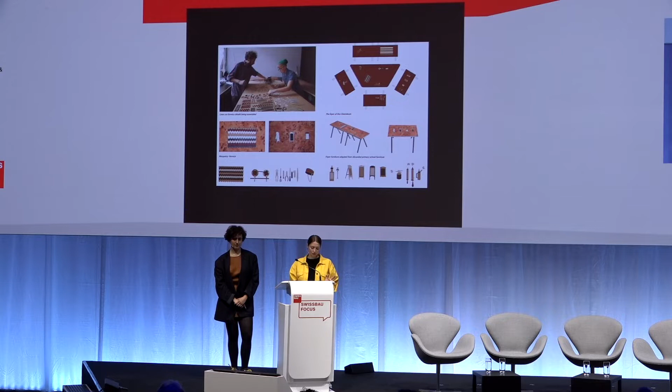It's a way of working, of defining just enough beforehand to ensure some success, but with enough slack to allow the project to take on a life of its own in an unexpected way. In this sense, the material we were working with was as much the method for making as the material itself. And designing clear ways of communicating the material intentions was as important as their design.

Since then, I guess it's been 12 years now that we've been working, we've worked on a range of projects, and we're going to share just a few which talk about materials.

So this is somewhere where material and craft skills are very connected to place, in Tokushima in Japan, where we designed this space for beer tasting for a brewery.

We worked with a lot of local artisans who are specialists in timber work and indigo dyeing. We also learnt from the raku firing method of ceramics and made the building, but also furniture and smaller scale vessels for drinking.

So you can see we had a lot of opportunities to work with amazing makers and produced things which build on that knowledge. This is the space inside. This poetic tea ceremony.

Then currently we're working on a project in Arles with the Luma Foundation. And the idea is to try and work with their incredible research capacities, looking at local regional materials that are new and existing.

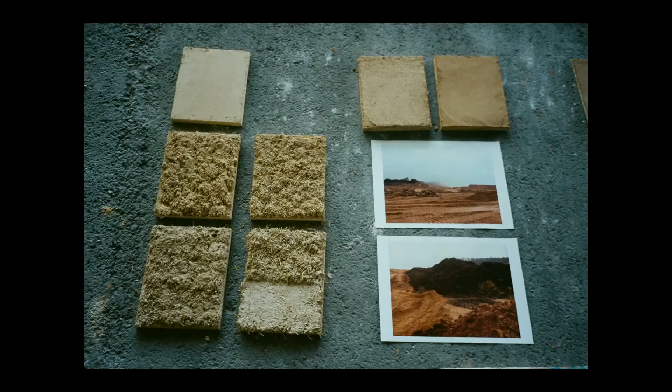So we're designing a new building for workshops, labs, and places for production, but also a garden and storage space. This is very much a back of house building next to all the other exhibition spaces there. So we're working in traditional architectural model making, but also prototyping one-to-one materials.

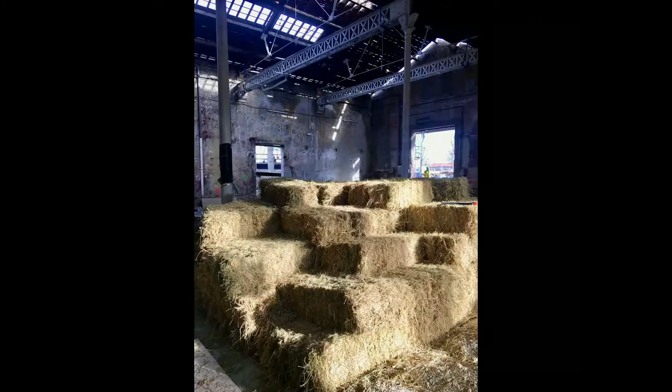And we're collaborating with another practice called BC, who are based in Brussels. We're testing out using local quarry waste and clay and waste from agricultural production, such as rice husks and sunflower, to make acoustic panels, but also natural insulation.

We're trying out a lot of funky techniques of staining timber, using algae, which is a locally occurring organism, which some of you might be drinking in the morning as spirulina. But it also creates color in textiles and other things.

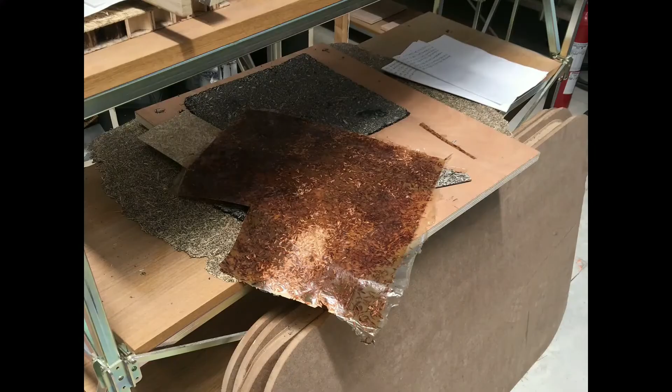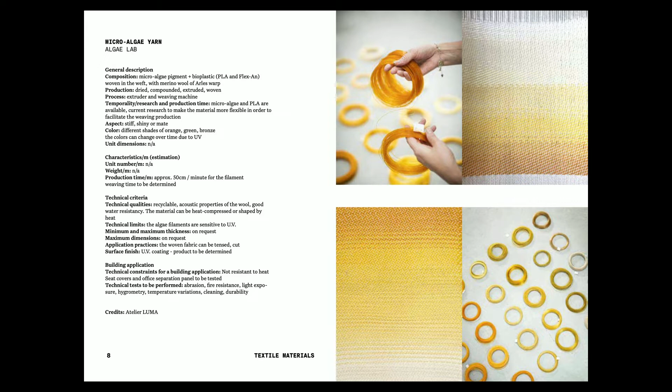This is just an example of the kind of things they make in their atelier with these ecological plastics and organic materials. They're also very ambitious, trying to take a lot of these products to market and looking at eco-plastics and things like that. So it's been really exciting working with them on developing the building.

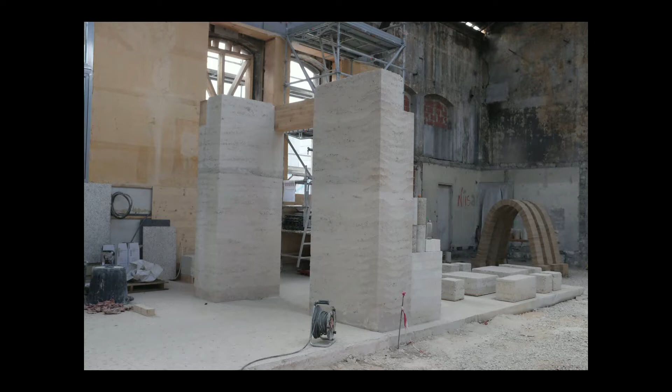And so we were working at a range of scales, details, but also looking at rammed earth and plaster finishes. This is a one-to-one prototype of a rammed earth wall that is going into the building. It's using waste from quarries to give it that white pigment.

Going to a lot of local quarries. I don't know if you know the south of France and Arles in particular, but it has a huge history of Roman stone construction and incredible stone quarries that we've gone on a lot of visits to see, and a lot of stonemasonry skills. So we're trying to utilize local knowledge and materials and explore that.

This is another model we made, a 1:10 model of a stone construction that looks at using waste and different types of stone in a column and beam structure.

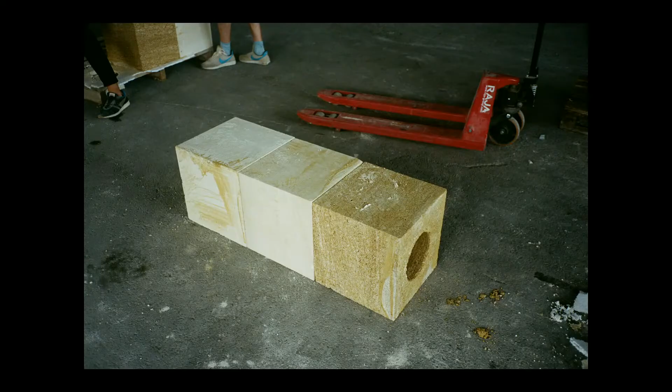This is another example of a one-to-one prototype using stone waste in a composite column and beam structure. Different types of stone, 3 different types of limestone.

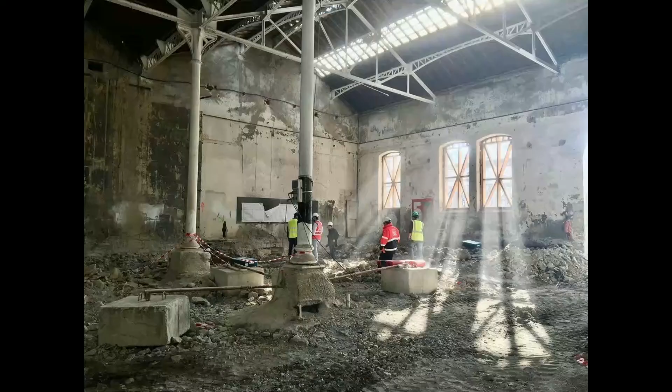This is another one-to-one prototype of those 3 different types of limestone in a construction strategy which looks at using every part of the stone. The building is on site now and should hopefully be finished this year.

Another kind of third strand to this talk is creating spaces for other people to think about materials. That ranges from children - Baltic Street Adventure Playground is a space in Glasgow, Scotland, all about creating a really messy, chaotic space for children to move stuff around, to move material around. It's really not about it looking beautiful or finished or perfect.

I don't know how we'll go with the kind of high design ambitions I've seen in Basel, but yeah, it's an experimental place.

Then a more professional space for makers that specialize in wood and metalwork. It's also an incubator space for young designers who make whatever - jewelry or large-scale timber production.

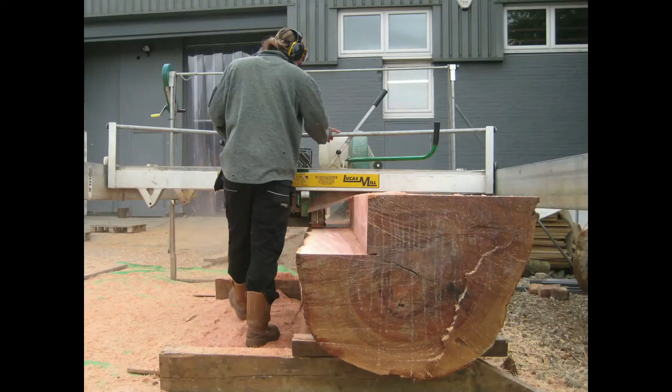On another scale, part of a bigger regeneration project in Liverpool, where we designed housing and new commercial spaces, working with a community there who set up a community land trust, which is a kind of alternative model of housing. And with them we created a workshop making specials for houses.

Currently focusing on ceramics, we utilize industrial machinery mixed with hands-on experimentation to create really unusual and varied products, such as these tiles which were made for the Venice Biennale in 2018.

And another one in New Orleans, an educational space focusing on textiles. It's really creating a new curriculum, very much about people at the very beginning of their design journey, learning how to work with textiles and design and making things. And they are making really incredible things there.

Last but not least, I'm going to briefly talk about the visiting professorship that we've been running at the EPFL since 2020. It brings in a lot of these aspects that Maria was just mentioning about the importance of material experimentation and understanding the material that you're working with in order to make design.

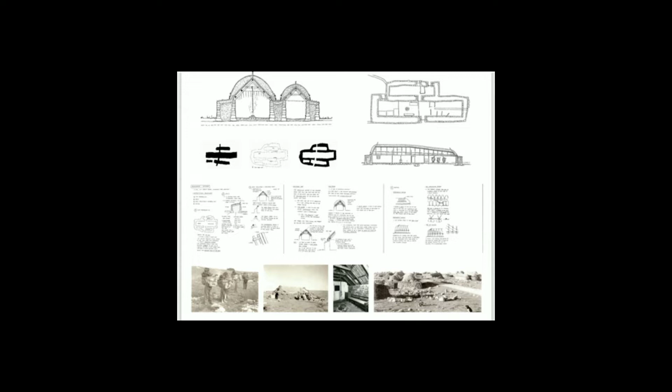And then the strategy of learning through building precedents. So the students, even during the pandemic, showing an amazing effort at designing and constructing these large-scale 1 to 20, 1 to 10 models, sometimes using not necessarily stone, but representations of stone, to understand these buildings from across geography and time.

Exploring how the contemporary interpretations of past architectural ideas can support our practice of design in the present. This is an example of a model of one of the black houses in Scotland that students looked at.

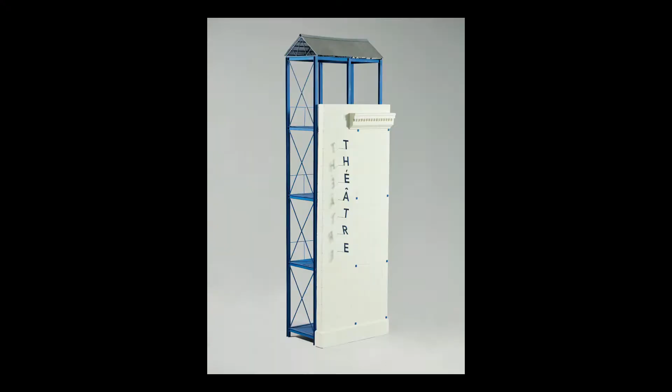Thinking about how this method of construction was intricately linked to a community, a landscape, an economy, a labor, and transience. And then trying to represent or reinterpret those precedents they've looked at in detail into their own projects, specific to places such as this one in Arles.

Since 2021, James, Maria, and myself have been running the studio again, this time focusing on timber and timber construction. We've been building our collective understanding of its material qualities as an environment, as a resource, and as a material itself, working within places and with people whose relationships with the forest and its cultural, economic, and social life...

...helps deepen our understanding of it as a material and how to act carefully and intelligently with it. So this is us felling a tree in the Jura Vaudoise, together with the help of the local forester, the local mayor.

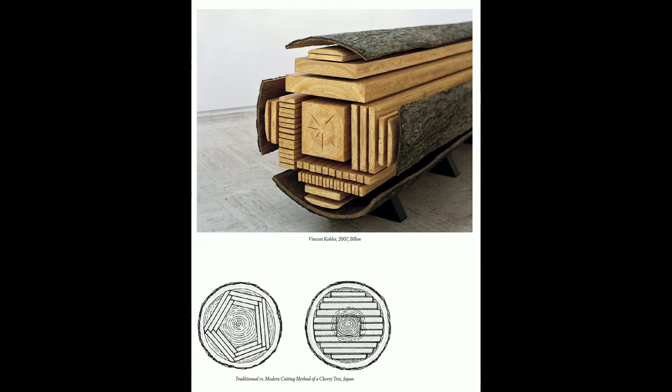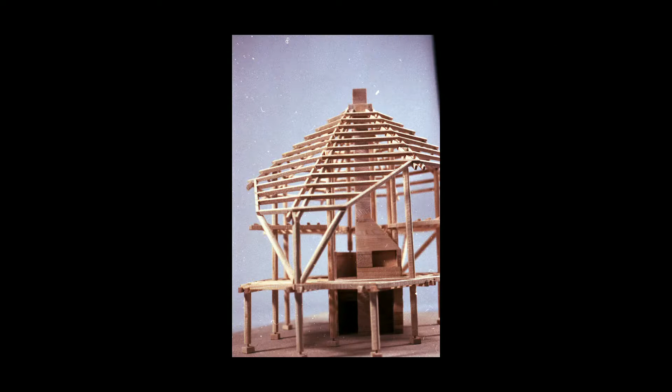We selected this tree and chopped it down ourselves. And then, using this machine within the forest itself, we turned this diagram into reality, and then used this as our raw material to construct the process models throughout the rest of the semester, which gave the students a much deeper understanding of how this material really works, especially when it's freshly cut, wet, and full of sap. We reuse this technique because it's so effective for looking at precedent.

buildings in a very careful way. Again, this is a 1-to-20 model of the Lisbeth Sachs house called Imschliff. And then we ask the students to design a large-scale enclosure or hall, something very simple, but based in that municipality where that tree was extracted from, as a way to tie back the idea of making material back to a place.

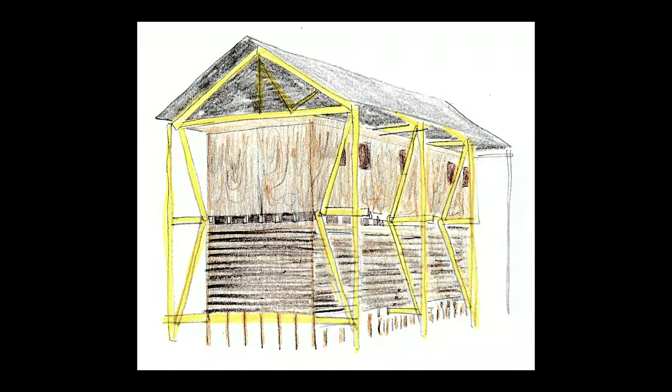which the students did with a newfound respect for the material they had so intimately worked with throughout the semester. And the material knowledge and relationships built through this work, both with the studio and the students, have begun a new set of long-standing collaborations, such as with this municipality in Butini, where we're currently collaborating with the mayor and the students to revisit their plans for a communal housing project this semester in the village using locally sourced material.

And that's it. Thank you very much for listening.

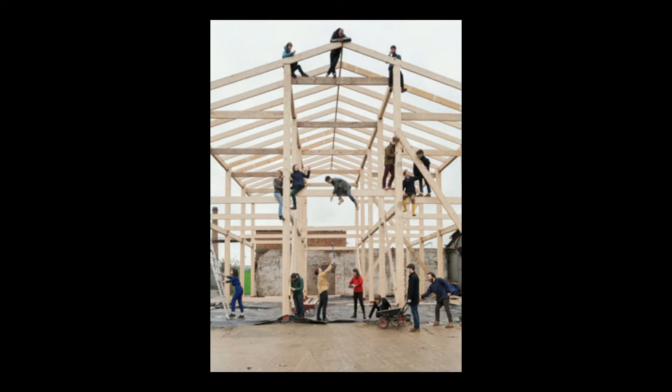Thank you very much, Amy and Maria. Quite a different approach to what we've seen today, seeing or going through Basel, where there are more finished spaces. And of course, I like your approach very much.

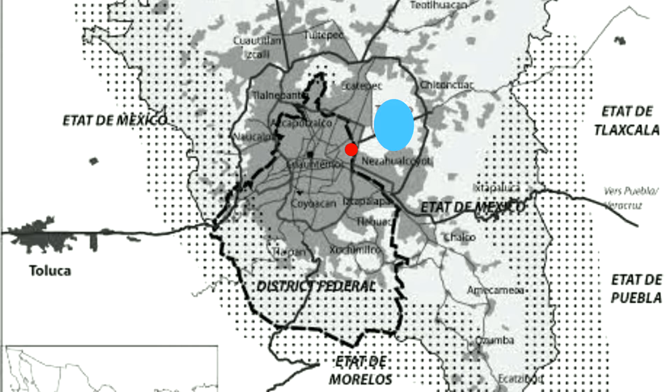Here you see an image in gray showing current Mexico City, one of the most dense populations in the world, with more than 25 million people. You see that little red dot—that's the current airport, the gate to the country. And you see in blue what remains of the lake of Texcoco.

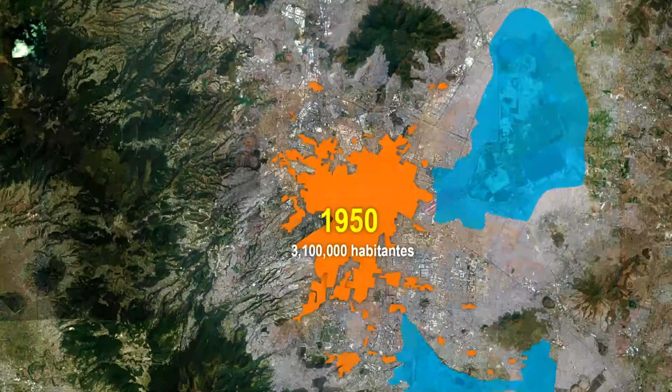In this animation, you understand the evolution of Mexico City and how, as we grew, we just compressed that airport. During 20 years of planning, we analyzed how to build a new piece of infrastructure connecting Mexico City to the world. I was lucky enough to partner with Norman Foster and win the competition for the new Mexico City airport.

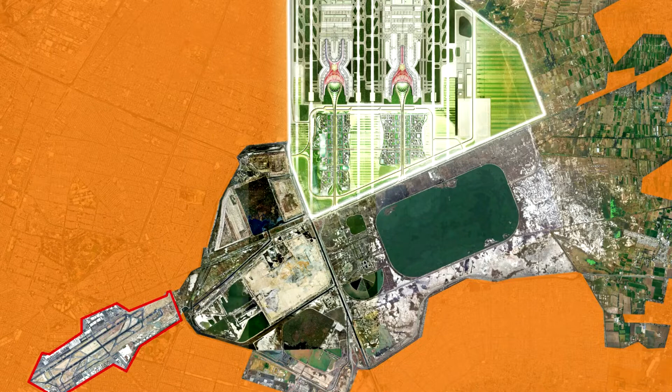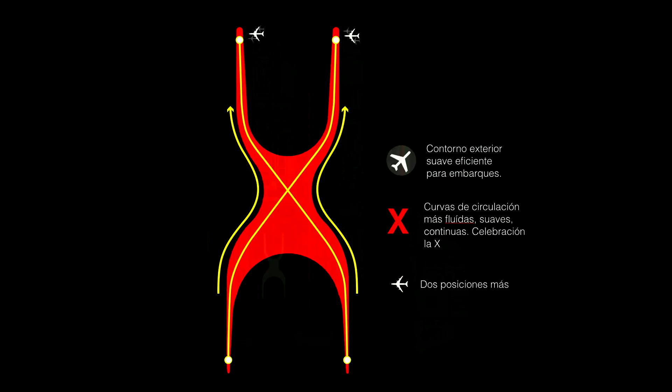It's basically a terminal, a new building that will become the gate to the country, in a master plan developed with Mitre that enabled us to receive up to 70 million passengers per year in phase 1. This is the white building you see behind me, shaped like an X, because the X is very representative of Mexico.

We thought this was the best way to organize the floor plan, so you have all the gates in the form of the X, and that became the symbol of the new airport for the city.

We worked 5 years with 500 architects between Mexico, London, and New York to develop the project. We developed 10,000 drawings and started construction of the project.

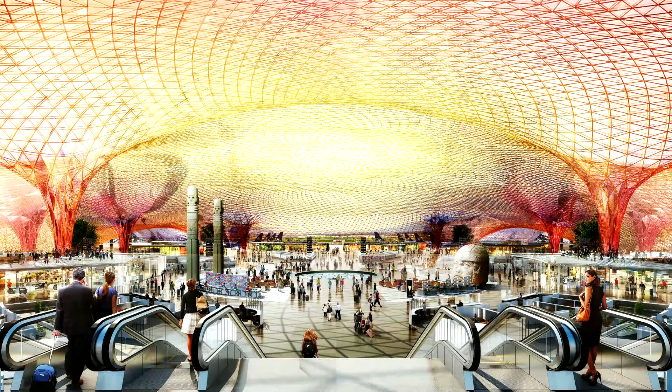But also to try to do a building that was extremely efficient with natural resources, so it became the first LEED Platinum airport in the continent.

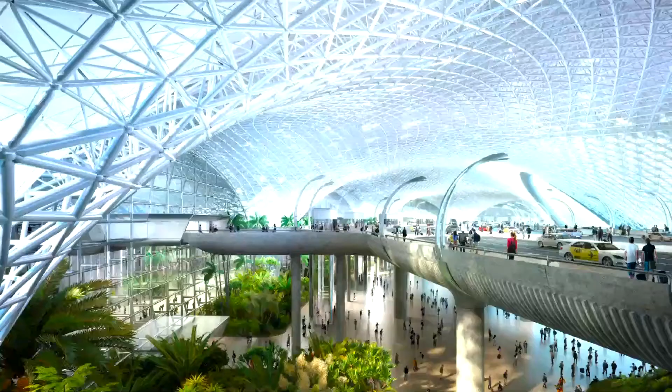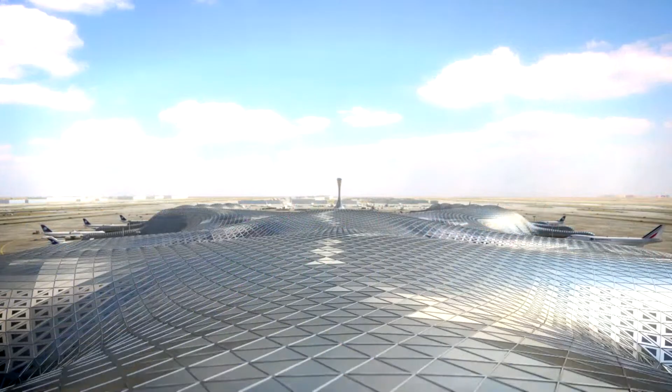This is a view of the envelope, and for us the envelope defines the DNA of the project, because it's the envelope that responds to the environment.

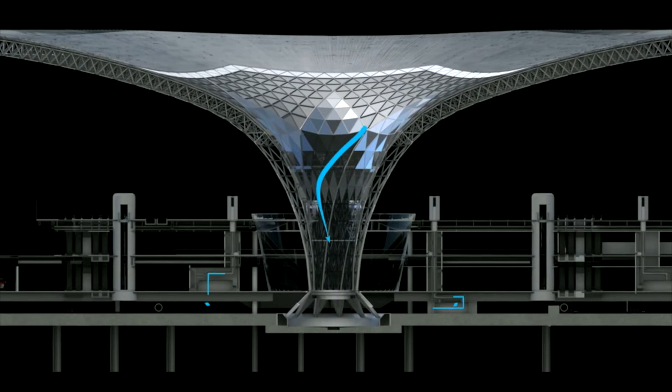We use that envelope to receive the air and inject it through tunnels to the interior of the building, but also to recycle natural resources like water and capture light for the building. So we worked with engineers to try to create an extremely efficient building that was state-of-the-art in terms of its engineering.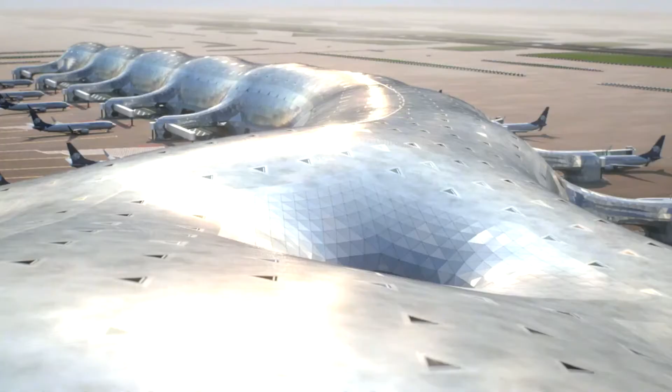Of course, investing in infrastructure is an investment for future generations. It's a possibility to boost tourism, to boost employment, to boost development.

An airport is that piece of infrastructure that is the first image you have of a country. So if you go to China and see Terminal 3, you see a building that represents China celebrating the Olympics. And if you go to Mexico City, we wanted to create a building that celebrates that Mexico is aware of the importance of their visitors and tourism, but is also interested in receiving you with open arms and receiving investment in the country.

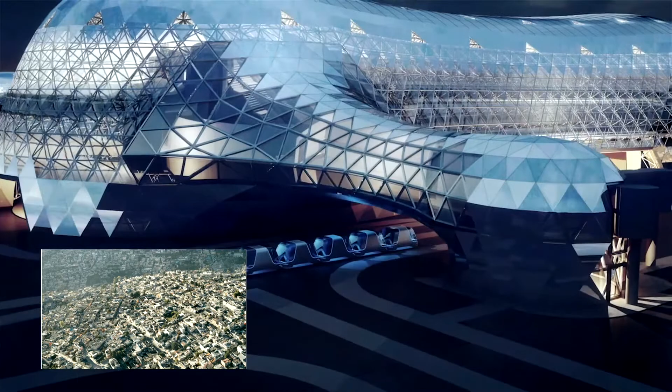The reality is that investment in infrastructure is an opportunity to reduce poverty, because you create sustainable social development. So we are convinced that this project will happen no matter what, sooner or later, because it's the only solution to connect Mexico City.

The next idea is about cities, because I'm designing one city, so I want to share with you the experience. As a young architect, when you see Le Corbusier and visit Chandigarh, you understand how the research of an architect can define the facades and define the DNA of a city.

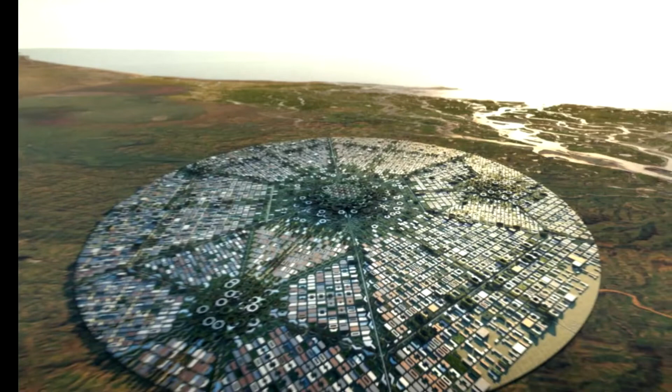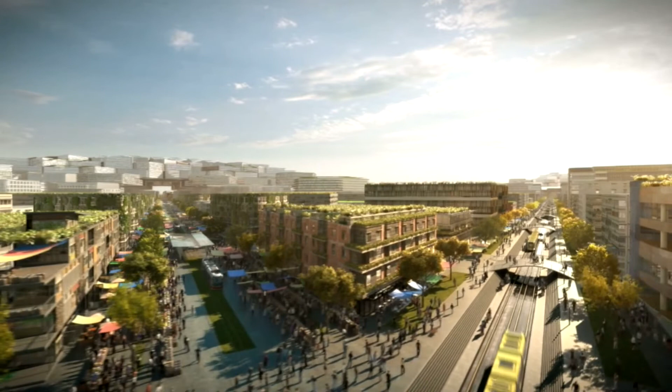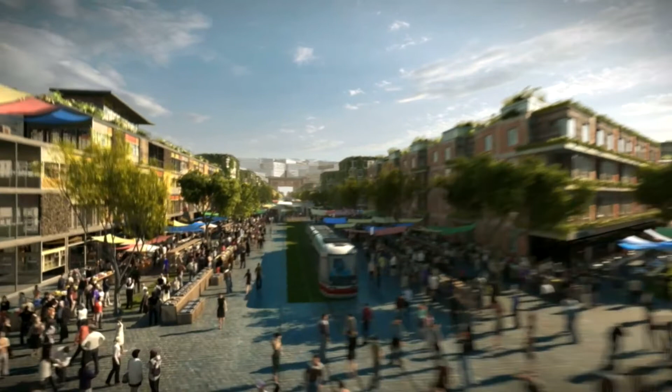Of Niemeyer in Brazil, with his organic lines, you see how a city can represent the political base for a country. I had a dream some years ago, in 2009, to design a new city in Honduras, because I heard they wanted to create a new economic zone to boost investment in a poor country in Central America. So I developed this city in New York with a partner, Buro Happold, with the idea to create a low-cost city that doesn't require a huge amount of investment but can be built with relatively low-cost technologies—an economic zone that invites investors to invest in the country.

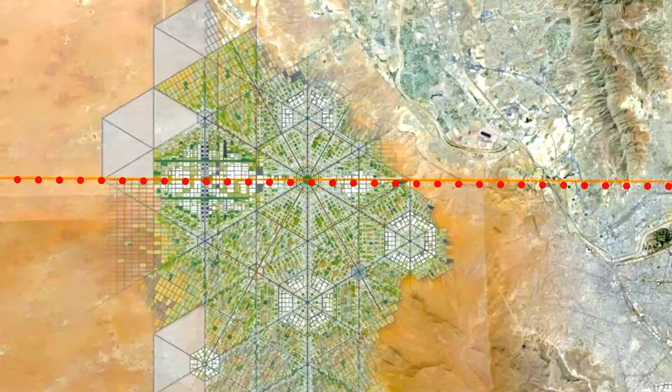I also worked on the border between Mexico and the United States in a research project called Hyperborder, covering the most relevant data of the border between these two countries. I designed a city between these two countries aiming to create an extraordinary social example of how you can integrate countries in a more efficient way.

But finally, some months ago, I met a visionary leader of Central America, President Bukele, whose first public image in the United Nations was a selfie before speaking to the people, because he thought that more people would see the image than would really listen to his speech. He's somebody with extraordinary sensibility for social media, but also a capacity and vision to really change a country.

He asked me if I could reimagine Honduras city as a new city. I thought, if I changed the design of the concert hall Casa da Música that I designed with Rem Koolhaas in the 90s, of course I can redesign a city based on Bitcoin. So in two weeks we worked with his team and redesigned Honduras city into Bitcoin City. He presented it in El Salvador at the Bitcoin conference. The whole concept is that the values of Bitcoin—transparency, protected rights, privacy, security, decentralization, powered by the people, and motivation—are also present in the city.

It's extraordinary to talk about Bitcoin in Switzerland, of course, being an epicenter of finance. And the values of cities are in a way connected with those ambitions of Bitcoin: to be an inclusive space, to have a fair platform, to be healthy, sustainable, decentralized, accessible, and equitable.

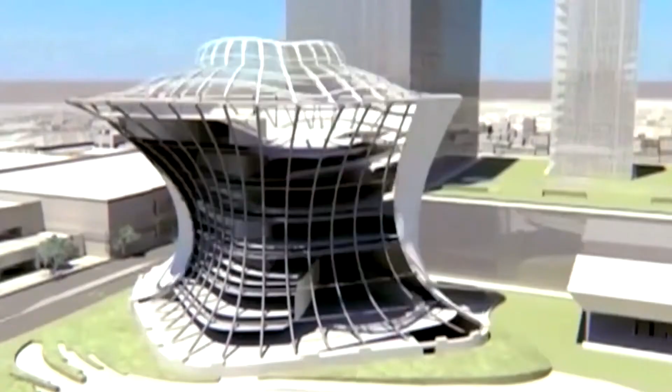An image of the city. In the center of the city we'll have a museum that I'll show in a moment, but not the type of museum I designed in Mexico City that is a container for a collection of art, mainly pieces of Auguste Rodin. This museum is mainly to celebrate the technology of Bitcoin.

I have been obsessed with the idea of creating spaces, but of course, to celebrate that technology is not about doing a form like this one. There is a museum, Soumaya, in Mexico City, the most visited private museum in the world, that became a destination due to Instagram, because everybody just wants to go and take pictures of the building.

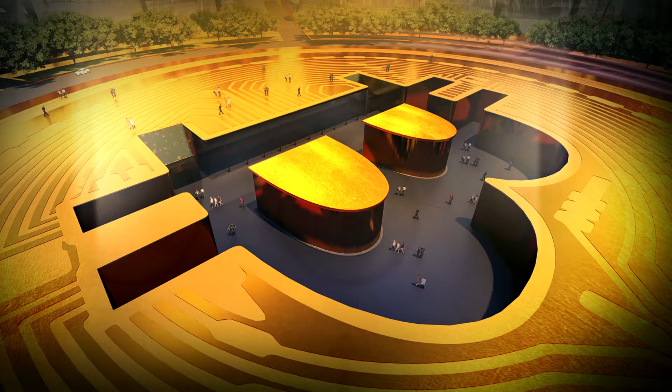At the center we have this plaza, and we wanted to do something that in a way connects with the history of architecture, so we wanted to carve a building. We carved the B of Bitcoin to create a sunken courtyard. And it's not the first logo, not the third logo—we carved the second logo, that is the image of the coin, the abstraction of a digital currency.

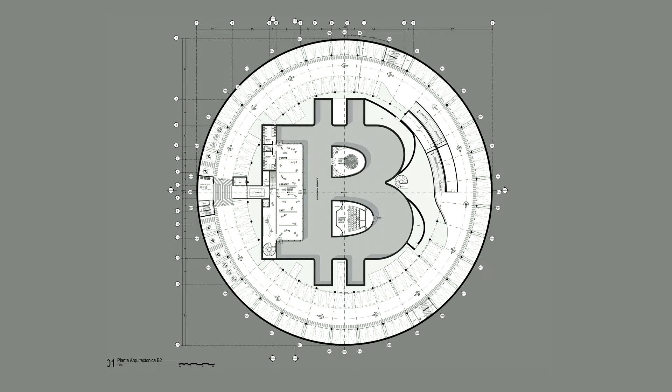I see some faces of surprise here. And of course, we are in Switzerland—it makes all the sense that people are surprised that somebody, a president, not myself, wants to create a building to celebrate this technology.

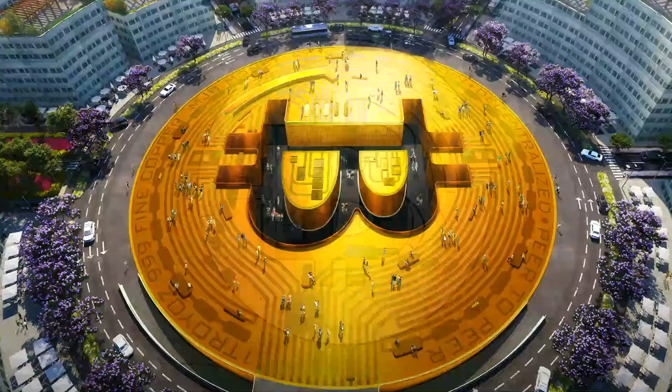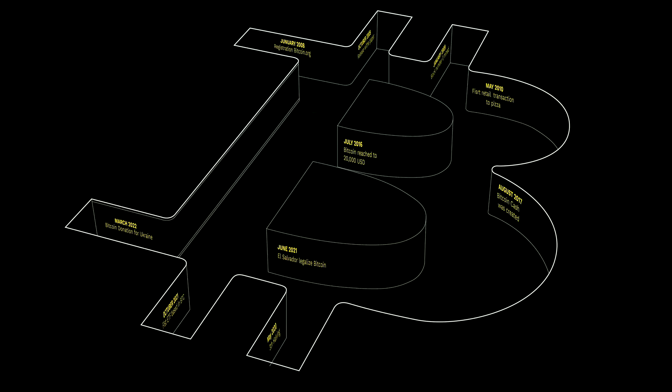We have parking all around the space, and basically it's the epicenter of the city, in which on the plaza of this courtyard you have only one name: the name of the creator, Satoshi Nakamoto, which, as you know, is an anonymous name—somebody that nobody really knows who is. But it's this feeling of having a space where you celebrate something that came to change the world, where you'll have on the walls inscribed some of the most important moments of this disruptive technology.

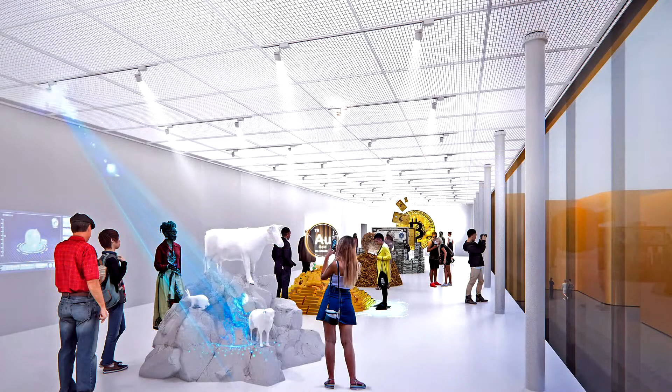We have a very compact, efficient museum organized in two floor plans in which you will understand the evolution of the history of money. A simple museum, almost like a box, where you can understand how we started to exchange grains, animals, gold, coins, cards, until we arrive at this disruptive technology that, at the end, is about energy.

A lot have said about Bitcoin, about how expensive it is or how bad it is for the environment. But actually, El Salvador is mining with the energy of volcanoes, with the energy of the earth.

And this museum is the opportunity to show the leadership of this president and this country in terms of Bitcoin, because it's the first country that has adopted Bitcoin as a legal currency. And for those who don't really understand or like Bitcoin, this is simply an interesting scheme to analyze.

Just as an example, when I was a little kid, I would take the phone and call an operator who connects two cables to connect me with somebody else. And that's the way in which we're still sending money through countries.

And why this is meaningful is not because of us in this room, but because a Mexican washing dishes in the United States is sending money to their relatives, and there are billions of dollars in the hands of banks that could be in the hands of millions of people in the world who don't have money for their families or any savings. So that's why this is meaningful.

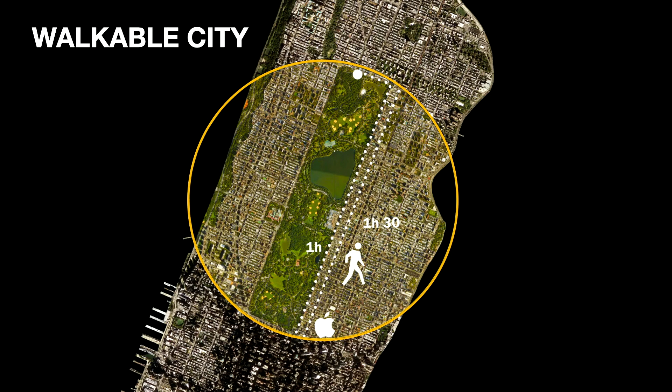An important aspect of the city is also to be a 15-minute walking city. Basically, the diameter of the city is the size of Manhattan. In order to develop a city you can walk in 15 minutes, that is circular because it celebrates that technology, we worked with Buro Happold in New York to try to create the perfect city.

In terms of mixed-use program, we organize by first understanding the topography of the land, then we organize different epicenters, and each of these epicenters has components of mixed programs that enable you to have a walkable city, an enjoyable place with mixed-use floor plans.

Because my time is finished, I want to end with this. I want to thank you all for your patience in seeing this lecture, and it has been a pleasure to be here in this presentation. Thank you.

Thank you. 15 minutes. Thank you. 15 minutes city, 15 minutes keynote. Thank you, Fernando. Completely different scale, we heard. That's the aim of this contribution.

We will end the keynote lectures with Grafton Architects' Shelley McNamara, who co-founded Grafton in '78 with Yvonne Farrell together. They taught at the EPFL in Lausanne from 2010 to 2011 — that's the relation to Switzerland. They also taught at GSD Harvard and Yale, and currently are professors at the Accademia di Architettura in Mendrisio. In 2018, Yvonne Farrell and Shelley McNamara were the curators of the Venice Architectural Biennale; their manifesto was Free Space. After winning the 2020 RIBA Gold Medal, Shelley and Yvonne have been selected for the Pritzker Prize in 2020. Just a few weeks ago, they won the 2022 European Union Prize for Contemporary Architecture, the Mies van der Rohe Award, for their Townhouse Kingston University project in London.

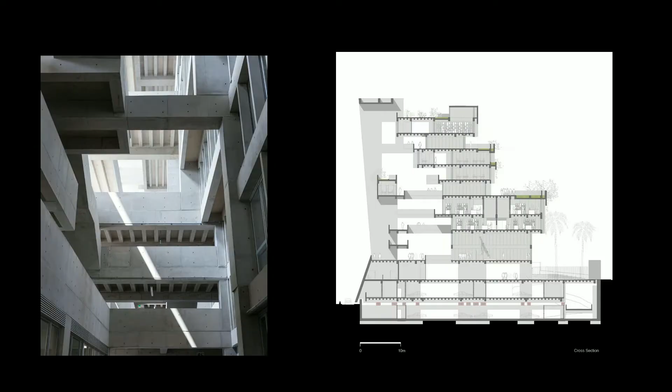So we made this porous structure, as I say, infrastructure, facing north towards the sun, leaning towards the north to protect from the sun. It's a vertical university—it's a seismic country. It has stacked laboratories and classrooms and libraries on one side, facing a beautiful residential quarter, and it has this vertiginous space facing what is a hostile motorway.

In a way, this project envelops a number of the values that we pursue, which is that thing that Alejandro de la Sota suggests, that architects should make as much nothing as possible. In our experience, in our work, that is the role of architecture—it's the additional space that you make, that space which is the cartilage and holds everything together. It's the void, what de la Sota calls the nothing.

Here this void is this vertical nave-like space, which is kind of extraordinary and surprised even us, because you can't see the sky. The building looks like it's porous on the outside, but feels like a cave on the inside. So it's very much about climate, about the culture of Lima being about an external life, living on the outside because of its climate—there's no rain, there's no insulation. And for us as Irish architects, that was a kind of playground.

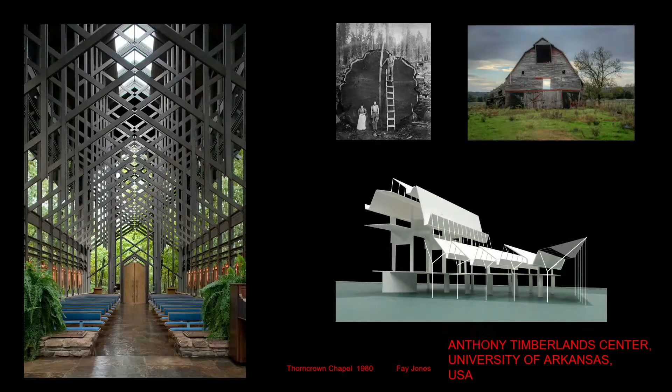We found this extraordinary building, which we didn't know before winning this competition, by architect Fay Jones - the Thorncrown Chapel. It's really interesting in terms of contemporary issues: he made this beautiful church inspired by Sainte-Chapelle in Paris, and all the pieces of wood are such that they can be carried by one man through the forest. So it's constructed in a really economical and inventive way.

On the other hand, we have the Ozark barns, the rudimentary, workman-like barns built by farmers. We were between these two worlds, let's say, and the wonderful image of this huge tree reminds us of the importance of materials - not just timber, but that one of the contemporary challenges is to use materials with respect. Our project was to make a kind of combination between the Ozark barn, you might say, and an academic building, which builds up to having a civic presence onto the public domain.

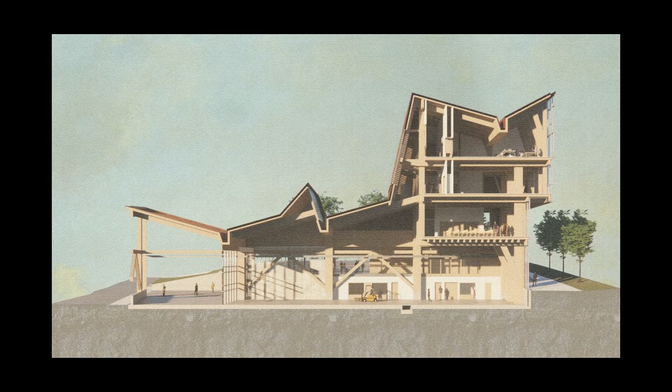One of the extraordinary things about Arkansas is their rainfall, which is throughout the whole year, with huge deluges of rain. So the gutters were designed into the primary structure of the building. There are these canoe-shaped beams which collect the water and deal with the rainfall.

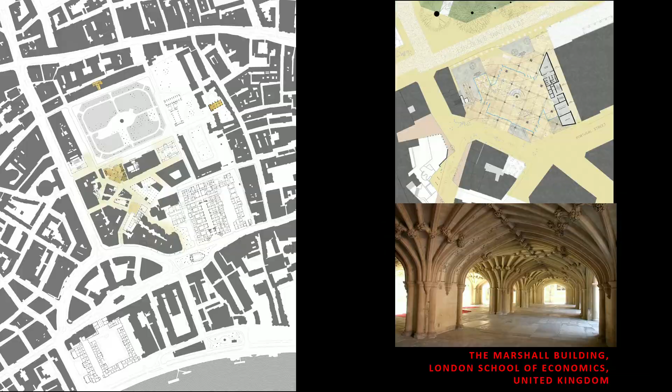Then we moved to London, to the London School of Economics, overlooking Lincoln's Inn Fields. The challenge here, again an academic university of professors and students, was to make a space which would release the university from its tight streets and create a great hall, a place of gathering, a civic space, a free space, open to all.

We used the Lincoln's Inn church, this beautiful undercroft space right next to the university, which supports a church up above and is open on the ground floor. We felt it was a really beautiful reference.

Unlike Arkansas, but maybe similar to the Lima University, this is a vertical university with a range of spaces: a huge span sports hall on the basement level, then the Great Hall on the ground floor, two floors of lectures, and six floors of research offices.

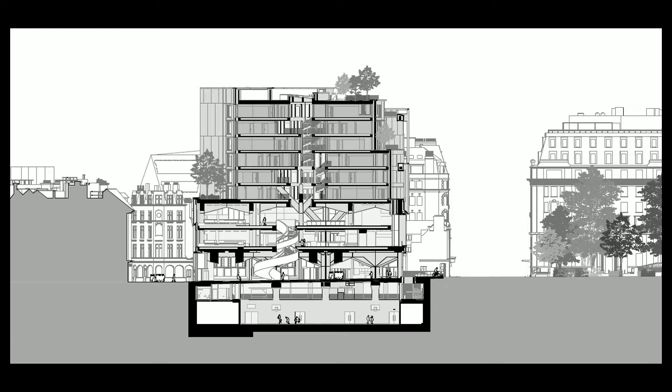We used the transfer structure between the sports hall and the upper floors as a weight-bearing construct to support all the floors above. So instead of burying the transfer structure into the depth of a floor, we decided to move through that space, because we had to make this transfer from very large spans to small spans.

I suppose what I'm saying is that structure, and woven into this, landscape, structure, context, education, the making of a free space and real space, is woven into these projects in very different ways.

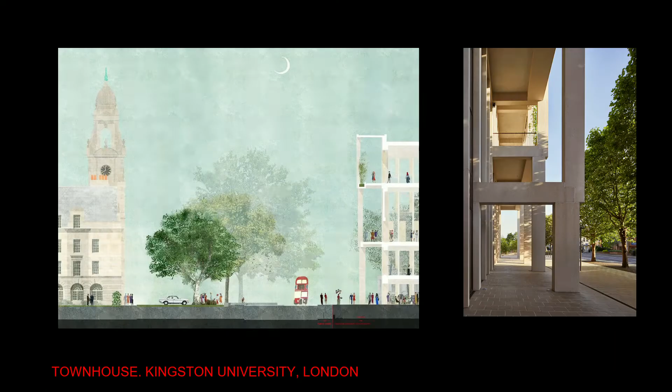The university in London that won the Mies van der Rohe Prize is quite a different building to any other we've done. It's called a townhouse, a space for students, not professors. It's a place to welcome students, to make them feel at home. It's a very open structure.

We call it a warehouse of ideas, using a very classic concrete frame construction, with large spans, columns and beams, and we modulate everything in terms of light, air and ventilation. What's interesting is we've used a loggia to make a civic space at the edge.

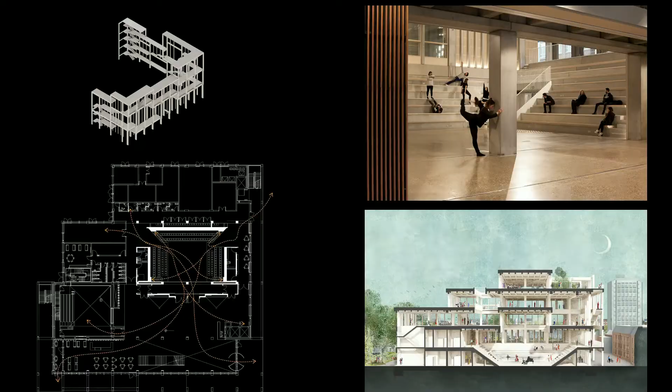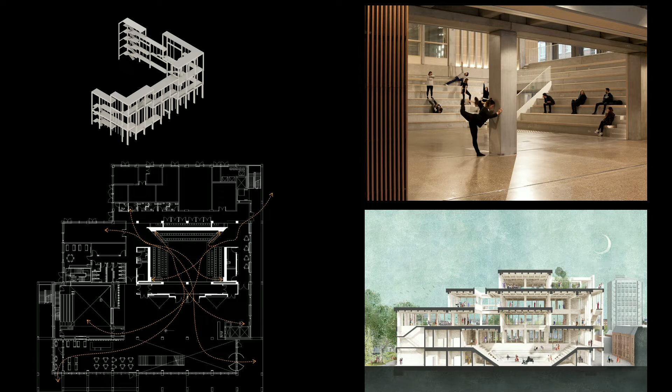The next image will show the wraparound of the loggia. We were very influenced by Jørn Utzon's furniture showroom in Copenhagen in making this project.

What's fantastic is that this brings dance and library together. It's first generation, third level students in many cases. It has a very mixed demographic, and it activates and practices a duty of care to all of these students.

What we really loved was bringing dance and library together, and rather than separating them, we decided to bring them right into one space. It's incredible how the life of a building, how other disciplines infect or act as a catalyst to each other, when you have the quiet and contemplative combined with the physical and active.

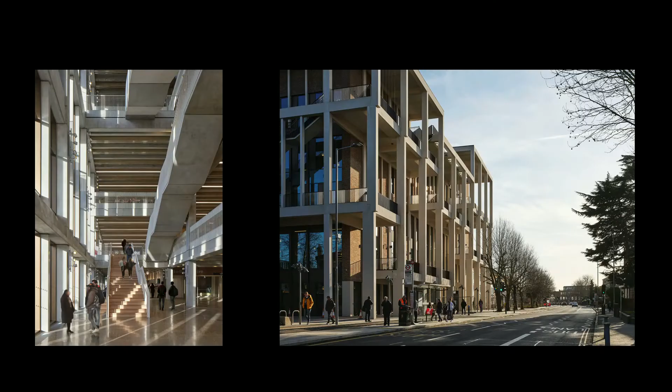Moving on to the streetscape and how the world of the citizen is invited: this building will be open 24 hours a day, 7 days a week. It has no barriers, no security. It's self-controlling, with that sense of being open and welcoming.

In a way, the architecture stands back in this project, in order to allow the vision and life of the building to flourish. The colonnade has stepped terraces with planting where students can sit outside and study, opening the student up to the big horizon of the world.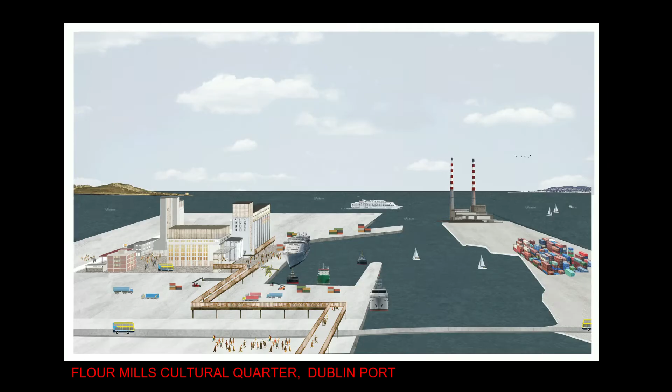Setting a different scale as a lead into the Dreispitz competition, we won a competition a number of years ago in Dublin for the cultural quarter in Dublin Port. This was a new experience for us, to think about something at this scale. The idea was to make a connection between Dublin Port and Dublin City, which had been disconnected, so walls are taken down and the theatrical life of a busy port is revealed to the city.

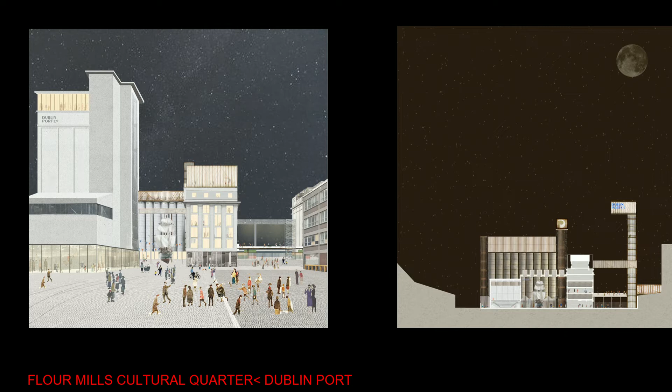We found that dealing with these structures was like dealing with a kind of geology, and it meant that all typologies were challenged, because nothing was normal. You had these huge concrete structures, these big steel silos, and we found ourselves completely liberated, able to occupy spaces we would never think of making with new uses, which I think was a lead-in to Dreispitz.

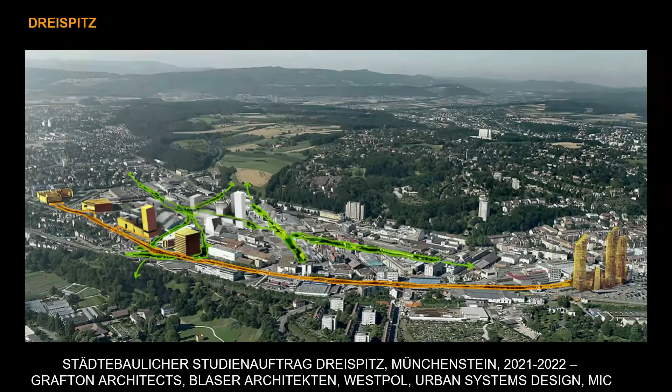The Dreispitz project was very challenging, and the collaboration with Westpol and Blaser Architekten and Urban Systems Design was fantastic.

What we felt about Dreispitz is that it's a place that's waiting for something new to happen. It's full of potential, and our role was not as building designers of buildings, but as a way of making an urban strategy to find a way of setting the scene, let's say, for radical reuse of this place.

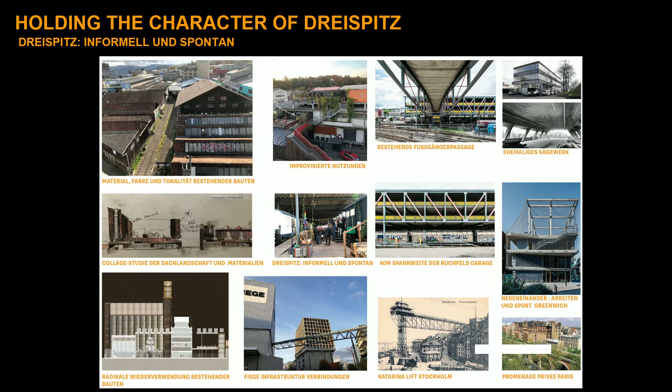As Christian said, we responded to the fragments of Dreispitz. What we found really interesting and refreshing is the informality of the place—the fact that there were improvised restaurants and spaces, that young people were taking over places to work, that it had this informal, fragmented quality, but that it also has what many cities have lost, which is space for the unexpected to come together and make a different kind of dynamic to what was there before in Dreispitz, and also to what possibly exists in other parts of Basel.

One of the things we were requested was to address the climate of Dreispitz, because the wind doesn't move through this place. It's a gravel platform overlooking the city. It has all these disused railway lines, which are fascinating.

We started to think about a new landscape which would feel like a river, flowing through these disused railway lines, almost like the Rhine feels like in Basel.

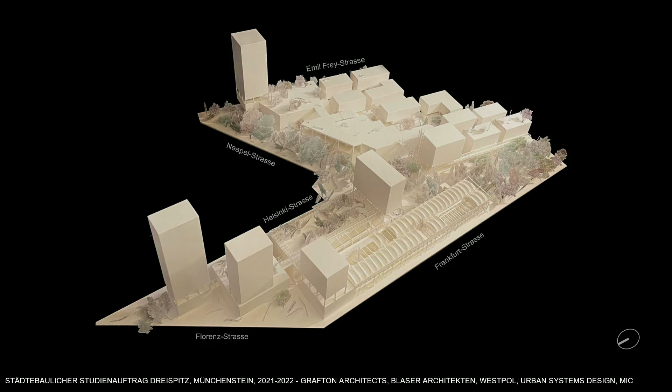This landscape really was the driving force in terms of how we might think about how you grow a place, how you grow a community, how you grow a landscape. We use the term, or Westpol used the term, a pioneering landscape, because it's gravel. It's not the same as other parts of Basel, so it's quite unique.

What you're looking at here is a model of an existing car park structure, a low structure about 200 meters long, which we used as part of the circus center. We were really delighted with this idea of circus and law and economics being in proximity to one another, combined with living, combined with library, combined with shopping and neighborhood facilities.

We found that the climate of the brief was very progressive, that it was open enough for interpretation and was really demanding in terms of how you make a new place and how you make a university of the future.

One of the things we were really pleased about, one of the bigger buildings we kept, is that we could fit a big university garden on the roof. I can't point to it now, but it's just beside where it says Helsinki Strasse, and that's 20 meters above ground. So again, a bit like the Dublin Port experience, it liberated you into areas and doing things you might not normally do if you were designing from scratch.

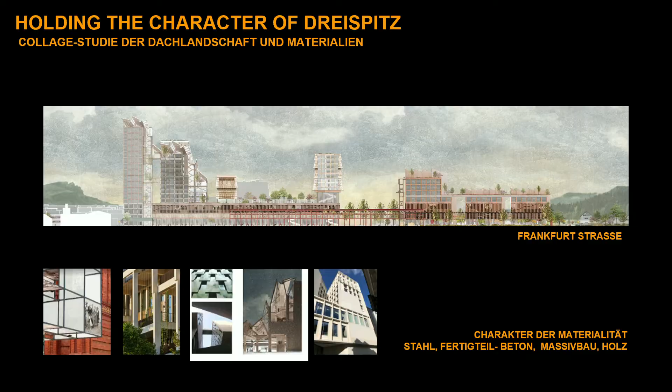I think I'm over time, so I'll just go through. We have the university occupying a big concrete warehouse. We have new buildings which float above. We have apartment buildings, people living over a university.

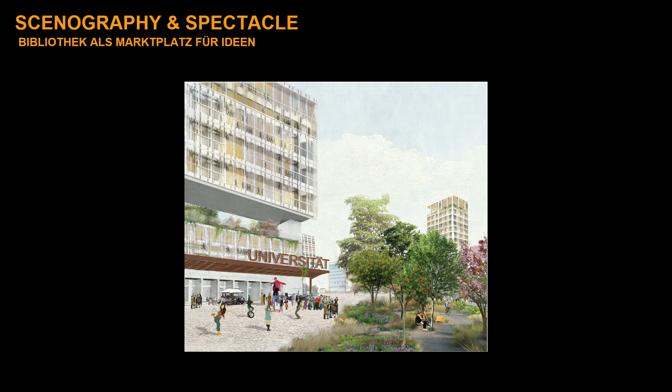All of the way of moving through this place is external or semi-external, horizontally or vertically. You're always connected with the garden, with natural light, with fresh air.

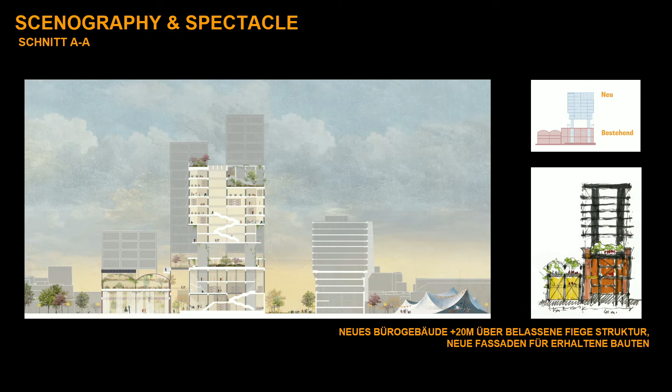It makes civic spaces. The last image we saw was the University Platz. This is the new building floating over an existing building, and the funny vaulted roof is the car park structure where we've made bicycles on top of the circus school, and they can access the library. So there's this lovely dynamic which the place allowed us to develop in terms of the section and ways of moving.

The circus center, which enlivens on Frankfurtstrasse and makes a new civic space, acts as a social magnet for this place.

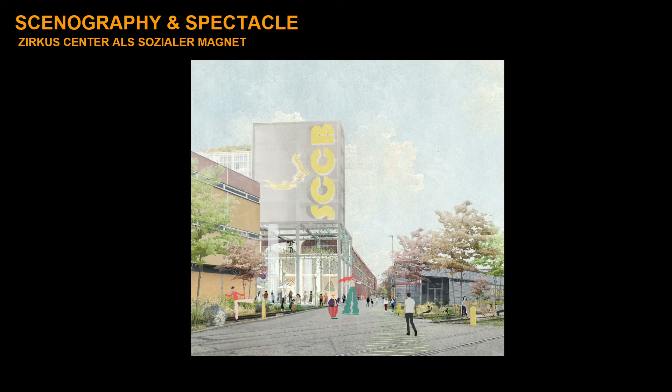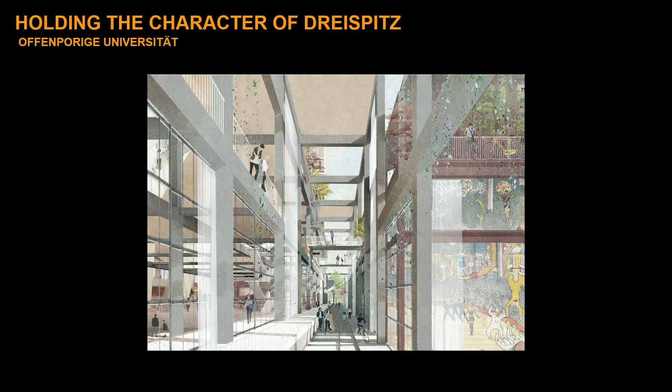And again, just looking, this is a fantastic track, a railway track that goes beside the concrete existing structure on the left and the steel structure on the right. And it's a sunken space. Is the railway line still there. So this is a new alley, a new path which moves between the circus school on the right-hand side and the academic world on the left. And that's something that I think is really important, in terms of our world has become too compartmentalized. We've become very isolated from each other, and this possibility of bringing things together is a real opportunity now.

Next image. And if I can ask Patrick to just go through the last two images, because I know I'm over time.

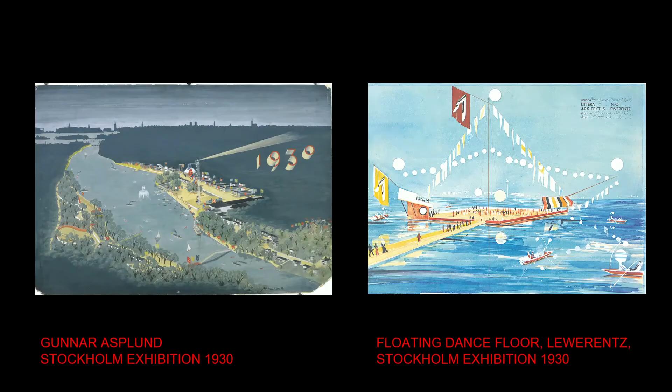Just finishing with this, which I didn't intend, but there's something I found amazing about looking recently over these drawings again of the Stockholm exhibition designed by Asplund and Lewerentz doing a floating dance floor, which I had never seen before.

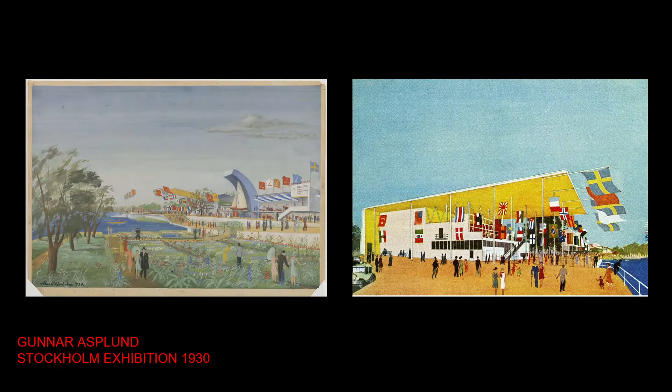And the next image. I just want to finally finish with something that Alvar Aalto said in relation to this exhibition, and it feels to me very current, where he says: the Stockholm exhibition has been clad in an architectural language of pure and unconstrained joy. There is a festive refinement, but also a childish lack of restraint to the whole. Asplund's architecture explodes all the boundaries. The purpose is a celebration with no preconceived notions as to whether it should be achieved with architectural or other means. It's not a composition in stone, glass, and steel, but rather a composition in houses, flags, searchlights, flowers, fireworks, happy people, and clean tablecloths.

And for me, as a friend of the exhibition, it is a great satisfaction that Gunnar Asplund, with this denial of architecture, in inverted commas, has hit the target and shown others a way of thinking which hasn't previously led architecture to any triumphs. Even the gentleman who is used to finding satisfaction in traditional architectural beauty, where historical study and a good cultural drill have helped him get oriented, will perhaps gradually find some reason for a whole new kind of joy as he walks around the Stockholm exhibition, where, for instance, blooming tulips in the garden have received the same care from the architects as the buildings and the exhibition hall interiors.